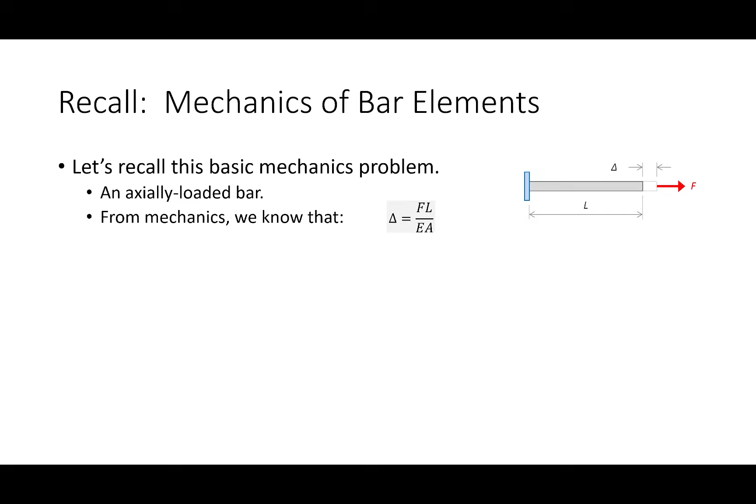How do I get that? I have sigma equals P over A. I have the strain as the change in length over the original length. And then stress and strain are related with Hooke's law if we assume linear elastic behavior. Now, I can rearrange this a little bit. Instead of writing it like this, I'm going to flip and multiply. If I have delta equals FL over EA, I'm going to rewrite that as EA over L times delta equals F. Or in other words, K delta equals F.

Okay? So this term EA over L, I'm going to call the bar stiffness. The term stiffness is very akin to a spring problem from physics. You probably remember that. You had some system that had a spring on it, and the force in that spring was equal to Kx. Spring constant times however much it's stretched or squished.

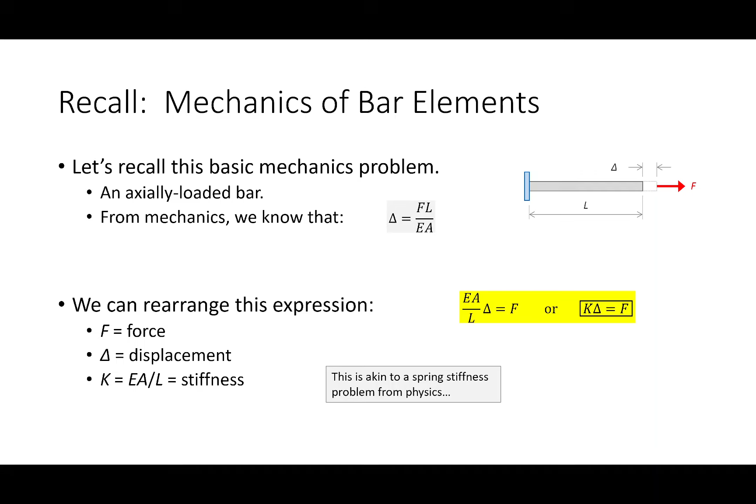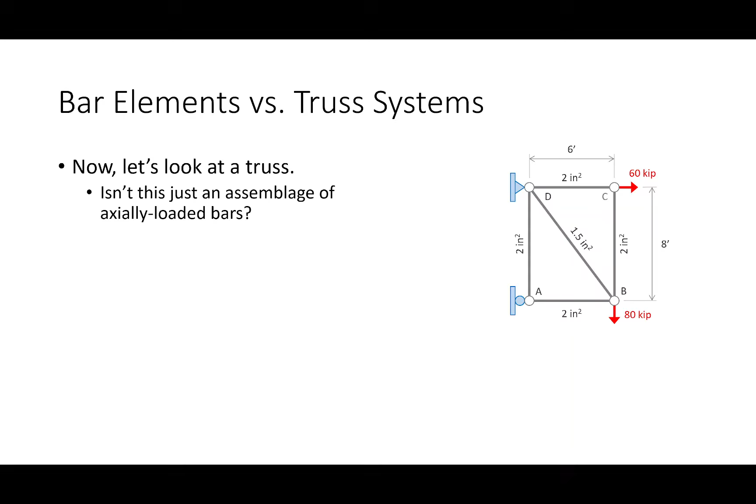Well, the reason I bring that up is that if we're looking at a truss, I propose that instead of looking at it as this big complex system, I would like to break it down into its base components. That truss is just an assemblage of bars. So instead of looking at a single spring constant, a single deflection and a single force, we can look at a stiffness matrix, a vector of displacements and a vector of forces, and turn this basically into a matrix algebra problem, okay?

This is how MASTAN, or really any matrix analysis-based software package, works. The name MASTAN comes from matrix structural analysis. But really any of the simple programs or really nifty programs, whether it's STAAD, RISA, SAP, whatever, they're all doing the same thing. They're all utilizing matrix methods to solve structures. Okay.

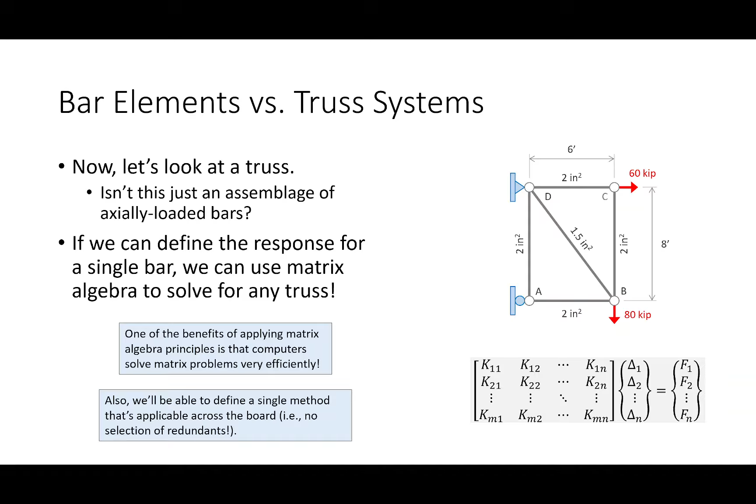The value of this is that we can define a single method, and by the way, everybody here has that method in front of you for a 1D bar element. We can apply this method to really any problem, and start to finish, we'll have the whole problem solved and every response we would need all at once. Okay? So how does it work?

Okay, I showed you this flow chart before, but now I want you to rethink about it. Now we're going to dig into the details. Because like before, what would happen is, here's the model, we click a little button, MASTAN does all this stuff in the background and gives us some answers. Well, now I want to understand all this.

Okay? Now, you could find a number of different textbooks that give you different ways of organizing this. Like, I have it in 4 parts. Some textbooks might have it in 3. Some of them might have it in 7 parts, whatever. At the end of the day, this is generally the same process, regardless of how you want to break it out.

So, the first thing that we're going to do is look at the spring matrix, or the stiffness matrix. I probably won't use the term spring matrix anymore, but the idea is that you're going to write a stiffness matrix for each element in the system, and that you then assemble them into a global matrix for the whole structure. Okay? You'll understand how that works by the end of class today. You then assemble a load vector, right?

And so if you go back to just sort of your basic problem right here, you start out by trying to get your K matrix, then you do your F vector, and then you say, okay, if I've got the K matrix, I've got the F vector, I can solve for my displacements with a little bit of matrix algebra, and then I take those displacements and I back substitute them into the rest of the system to get reactions, internal member forces, etc.

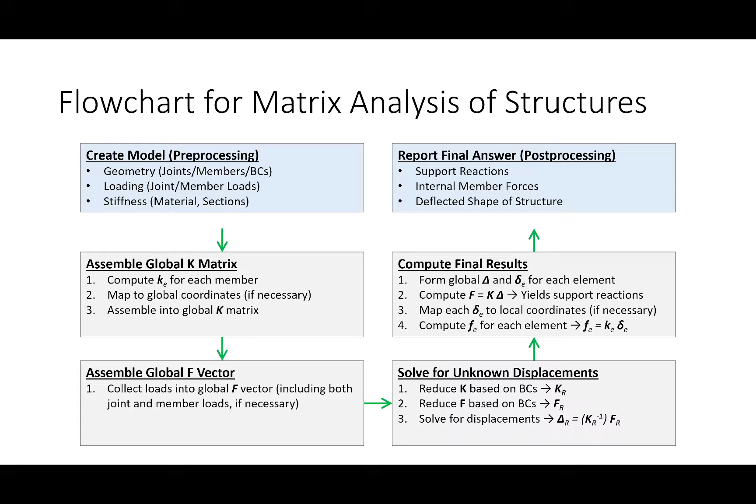And then when it's all said and done, you've got the displacement everywhere. You've got the force in every element. You've got the reaction everywhere, and it's all said and done. And now the only thing left to do is pick out the values that you're interested in, maybe generate any plots, what have you. And that's basically how matrix analysis works.

Okay? Now, we are going to be using matrices, so we do need to have a little bit of a review of matrix algebra. I'm going to cover the stuff that I think is necessary to get through today's lecture today. Then on Wednesday, we'll talk about a little bit more. Everybody in here has probably done a little bit of matrix math at some point, whether it was in high school, maybe you did it in some of your math classes.

I know we've done it in here, because remember when we did 2x2 joint solutions, when we had 2 diagonal members framing into a joint and we would solve 2 equations, 2 unknowns? Same idea, okay? But I want to be a little bit more global in some of the terminology that I use, and I want to make sure we're all on the same page. Okay. All right, so let's just go back to this.

We've seen this before. So the idea is that we can write a simultaneous set of equations in matrix form, okay? We did this a while back when we did joint analysis, and we had 2 equations and 2 unknowns, and we utilized the Casio FX115ES Plus or similar scientific calculator to solve them. Now, your scientific calculators are great for solving 2x2s. They're great for solving 3x3s. When you get to larger systems, you kind of do need to break out some software.

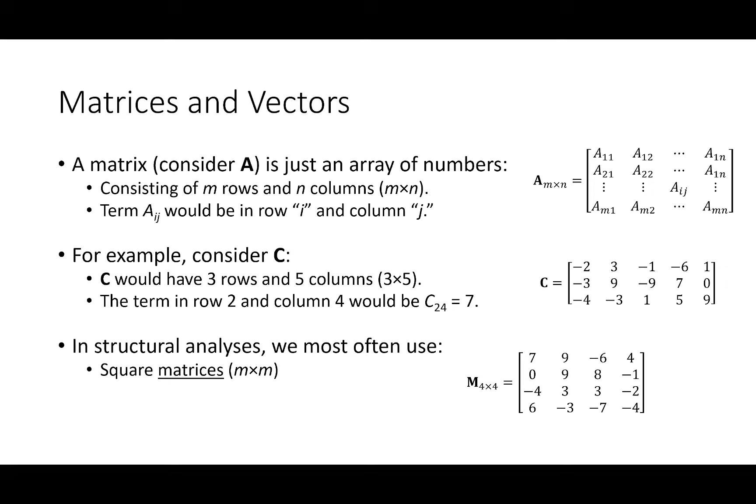Okay. Now, in structural analysis, we primarily only deal with two types of matrices. We deal with square matrices, and a lot of times you won't even hear me use the term square matrix, just by the nature of what we're doing. If I say matrix, more often than not, it's implied that we're talking about a square matrix. The other component that we'll use is a vector. So a vector is basically just going to be a matrix that has a single column.

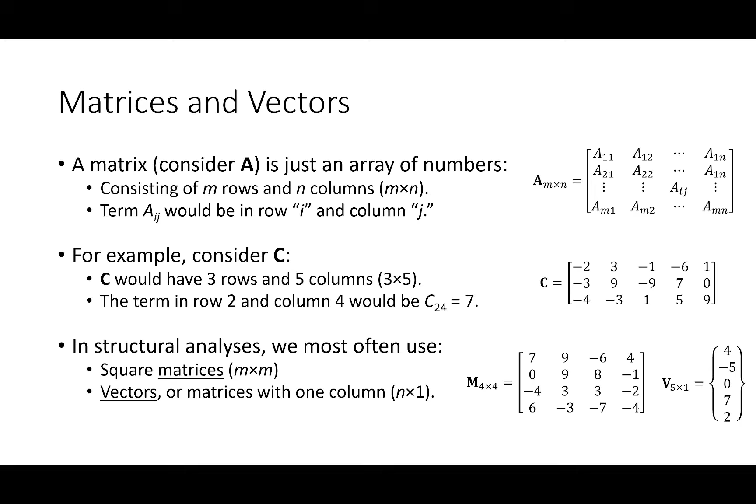One of the things that might have been a little bit subtle here on the screen is that if you open up a textbook and you look at the symbols that we use to define matrices, we'll often use bold letters, but bold letters are kind of hard to write by hand. So what I like to do, because these are really all we're dealing with, is I'll use curly brackets for vectors and square brackets for matrices. So if you see me using these, that's my way of writing this in a bold fashion. I even threw this there to clarify what's going on. Does that make sense? So it's a simple way of making sure we're on the same page.

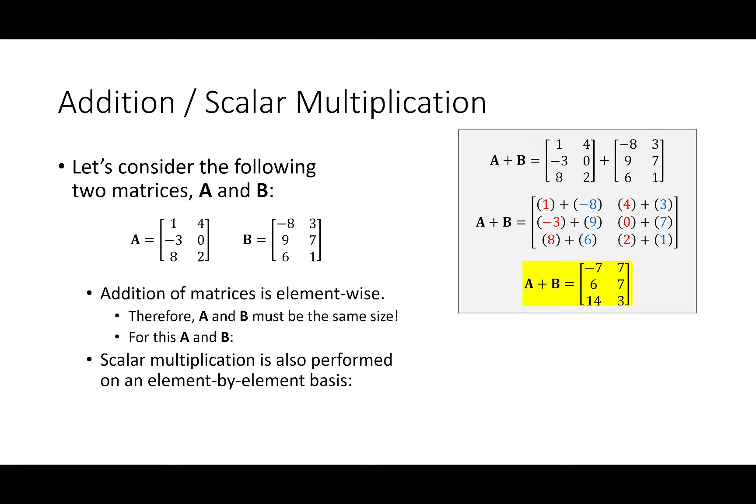How do you do scalar multiplication? Scalar multiplication is done on an element by element basis. So for example, if I have A and I wanted to do 3A, it's 3 times every number in the matrix, and I get this. So the flip side would be if I had a matrix like 2, 4, 6, 8, I could write that as 1, 2, 3, 4, and pull out a 2. If I'm factoring a 2 out, I'm factoring a 2 out of everything. Okay? Does that make sense? Okay.

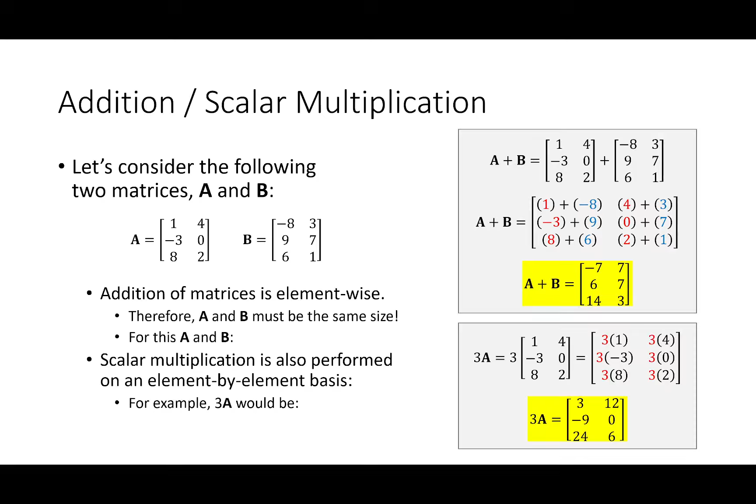All right. What about multiplying matrices? Have y'all seen this before? Do they do this in one of the calculus classes, being able to multiply two matrices? Maybe in Calc 1? Did you do it in high school? Okay. All right.

Okay. All right. So, crash course in matrix algebra. So watch this up here. In order to multiply two matrices, the matrices have to be dimensionally congruent. That is a mouthful. But what that basically means is that if you're multiplying matrix A times matrix B, this term and this term have to be the same dimension.

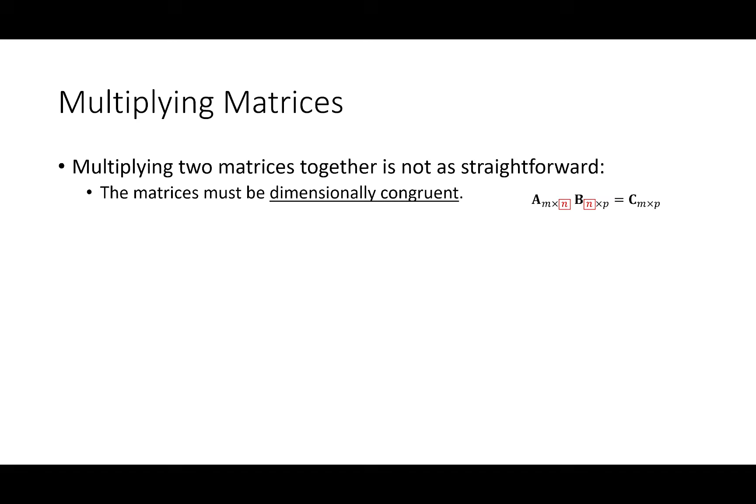Now I imagine many of you have not seen this, but I have a graphical way that I kind of like doing it. So first off, if you want to determine an individual term in the product, what you have to do is go along the row of this matrix and the column of this matrix and add up the products. I like to do it graphically like this. I'm going to show you how it works here in a second.

Now the big thing though, and this is probably the most important point that I want everybody to know, because to be honest, a lot of the matrix multiplication that we're going to do in here, we're just going to let Excel handle it for us. So I'm not super worried that you need to be able to do matrix math by hand, but I do want you to know that matrix multiplication is not commutative. What I mean by that is that in general, A times B does not equal B times A.

You can't reverse the order of multiplication when it comes to matrices. You have to maintain the order. Now, there is one exception to that, and that is when A and B are inverses of one another, which we'll talk about here in a bit. So let me show you this.

Okay, so watch this up here. Let's say I have matrix A and I have matrix B, and I want to multiply them. So this is what I like to do. I like to take matrix A, put it on the left, matrix B, put it up top. And notice how I've got these lines, almost like a grid, like I did it on graph paper. The answer is going to go right here.

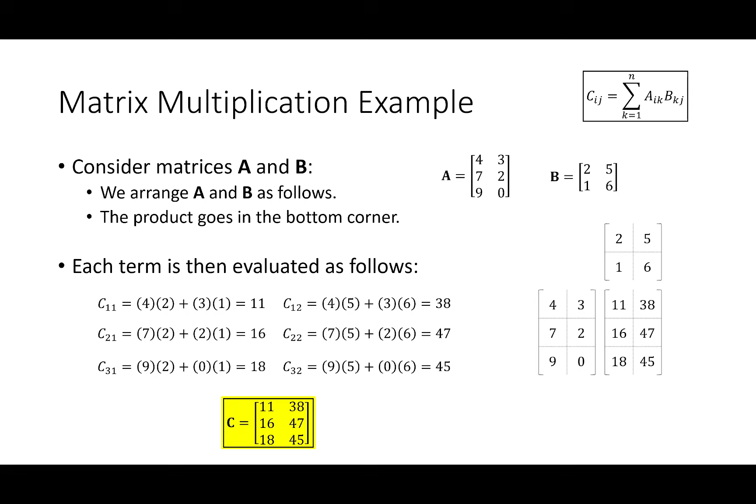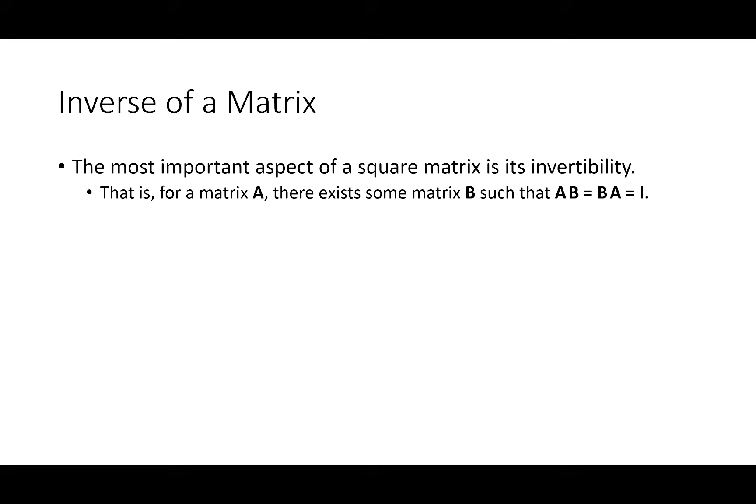Again, we're going to let Excel do a lot of this math for us. But the big thing to keep in mind is you can't reverse the order. A times B does not equal B times A, except if they're inverses of one another. Probably the most important parameter of a square matrix is its invertibility. In other words, if you have matrix A, there is some partner matrix out there in the universe, B, such that A times B equals B times A, and that product is the identity matrix.

So what is the identity matrix? The identity matrix is sort of the multiplicative version of the number 1 in matrices. Let's say I have the number 4. Its multiplicative inverse is 1/4, because when I multiply these two, it doesn't matter what order I do it in, I get an answer of 1. With matrices, there's really only one partner matrix with each square matrix if it's invertible, such that AB equals BA equals the identity.

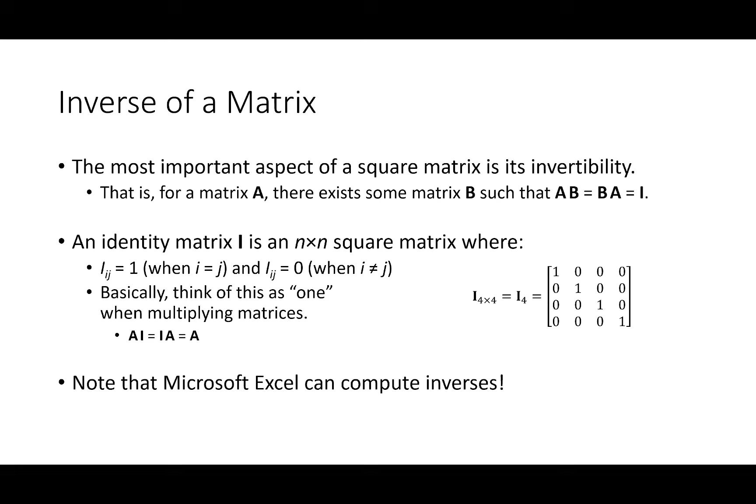And what does the identity matrix look like? It has 1s along the main diagonal, 0s everywhere else. So again, just think of the identity matrix as the number 1 when you're multiplying matrices. Can Microsoft Excel compute inverses? Yes. And in fact, the computation of an inverse of a matrix is like the whole topic of a field of math called linear algebra.

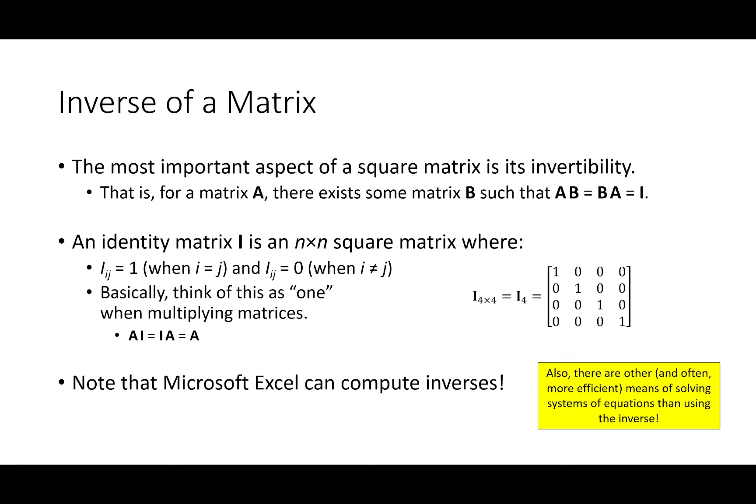So, this is my linear algebra plug: there are often more efficient means of solving systems of equations than just getting the inverse. For our purposes, this is going to be good enough for what we do in here.

Okay. Everybody okay so far? That's enough math reviewed for today. We'll do more on Wednesday.

Okay. So let's talk about matrix analysis. What I'm going to do is start my discussion for today and Wednesday with one-dimensional elements. Okay? We're going to go through a procedure. We're going to go through an example problem. Hold on. Now, what do I mean by one-dimensional elements? I want to start with elements that only translate left or right, okay?

And just to be clear, mechanically, there's no difference between how a bar element behaves and a truss element behaves. The only difference is how we formulate the problem, because truss elements can move left or right and move up and down, okay? I'm going to restrict my motion to left and right. Is that a very practical problem in real-life engineering? No, okay? Is it small enough so that we can understand how this process works? Yes, okay? All right, so we're only going to consider systems that can displace longitudinally, okay?

One thing we need to think about is for a given element, or a given component in a system, we need to start thinking in terms of what we're calling degrees of freedom. Okay? Degrees of freedom are how many total unknown nodal displacements there are. So I propose that each element in a system is going to have 2 degrees of freedom. So when I look at a given element, I propose that it's going to have 2 unique values that are going to define its displacement.

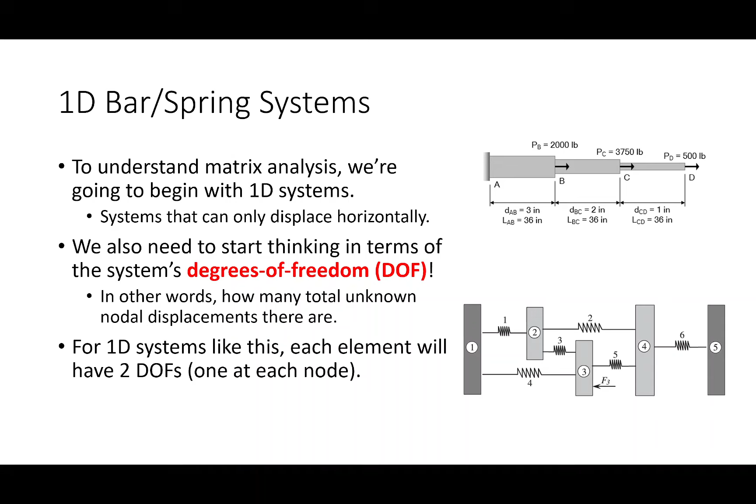How far this node goes and how far this node goes. So we call that delta 1 and call that delta 2. This is going to be a 2 degree of freedom element, okay? And I mention that because that's going to affect how we get our stiffness matrices and so on and so forth. Now, how are we going to do that?

Well, let's first off recall some of the ground rules that we're using for matrix analysis, and you'll notice I blanketly copied a slide that I showed you a little while ago. Remember the terminology between joint and node and member and element, that those were going to be interchangeable. Remember that with units, everything needs to be consistent, so that's going to be important for what we do together.

The sign convention, we need to refer to quantities consistently. So we're going to say that everything going to the right is positive, everything going upward is positive, counterclockwise is positive, tensile forces are positive, okay? You've already seen this before, right? I've shown you this, we showed you this when we did matrix analysis, or sorry, when we did MASTAN.

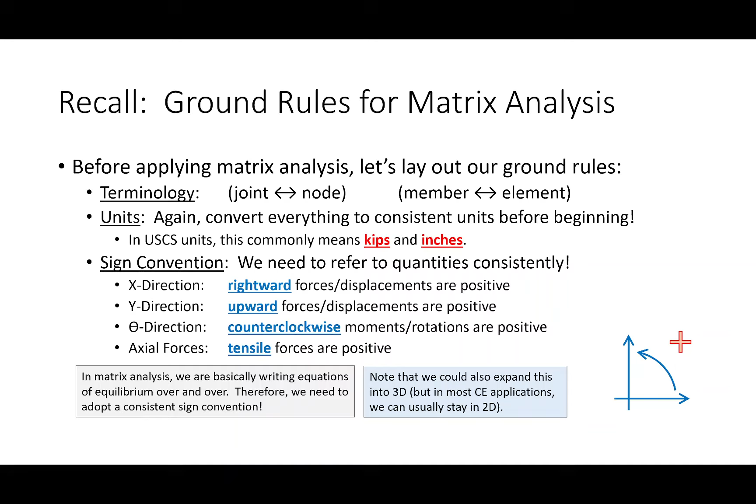Okay, so with all that in mind, I want to take a look at a single bar element, and let's see if we can define what the element looks like, okay? So for a one-dimensional bar element, let's take a look at what I got here, and you'll see a lot of this is going to pop up that I have here on the board. So here's the element. So here I'm calling joint 1 and joint 2, or node 1 and node 2, okay? So here's the bar element. We're going to say that its E is constant, its area is constant, and that it also has some length L, okay?

Now, keep in mind that forces and displacements to the right are positive. Remember what we said in matrix analysis, everything going to the right is positive? So I propose that there is an unknown force on this side of the element, and an unknown force on this side of the element. I'm writing them both to the right because I'm initially assuming they're positive. If they come out negative, well then I get a different answer, okay?

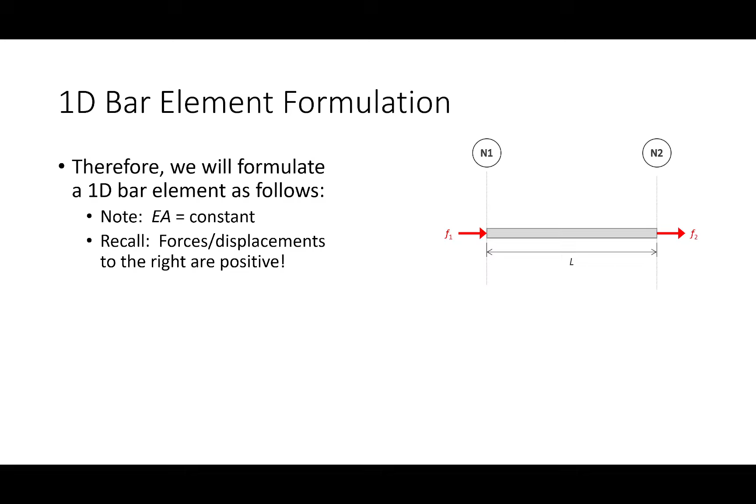I also have a displacement on this end and this end. I'm calling that displacement delta 1 and delta 2. I'm also showing that they're both going to the right. If they come out negative, it just means they're going in the opposite direction. Okay. Now we need to derive a stiffness matrix for this element. So here's what I'm interested in. All right, I want to define a stiffness matrix for this element. We'll call it KE. Stiffness matrix for the element, and I want to figure out what this is.

I'm trying to figure out what that is, okay? And by the way, you already know what it is because it's right there on your handout, but we're going to see if we can figure this out together. Okay. Now, how are we going to figure that out?

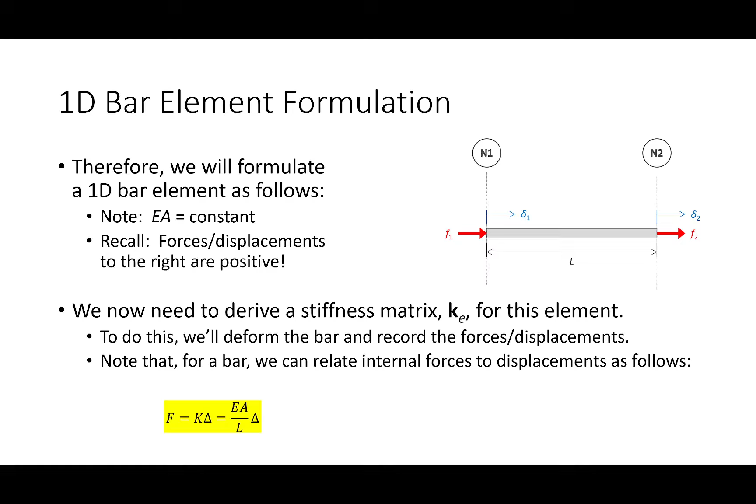Well, we're going to use this right here, F equals K delta, which is EA over L times delta. We already figured that out. One thing I'll say is that if we were using a spring instead of EA over L, we would just use the spring constant, so this will work for springs as well.

Okay. All right. So before I start clicking through the slides on the screen, I want to see if we can do this here on the board. Now, don't worry, everything I'm putting on the board is here on the slide as well, but I want to see if you all can walk me through what I have here on the slide. Okay, so I have here an undeformed element, and now I'm going to do a deformed element. Now let me show you what I'm going to do.

I'm going to deform this element by taking this point and moving it over, taking this point and moving it over. But I'm not just translating it, I'm deforming it. So I'm going to do it in a little bit of an exaggerated fashion. So I'm going to take joint 1, move it about right there, take joint 2, and I'm going to move it all the way over there.

Okay. All right, so just to put some dimension on this, I'm saying that this dimension right here is delta 1, and this dimension right here is delta 2. Does that make sense? Everybody okay on that? Okay, so all right. Is everybody in agreement with that, that delta 1 is less than delta 2? I mean, here's delta 1, big old delta 2, right?

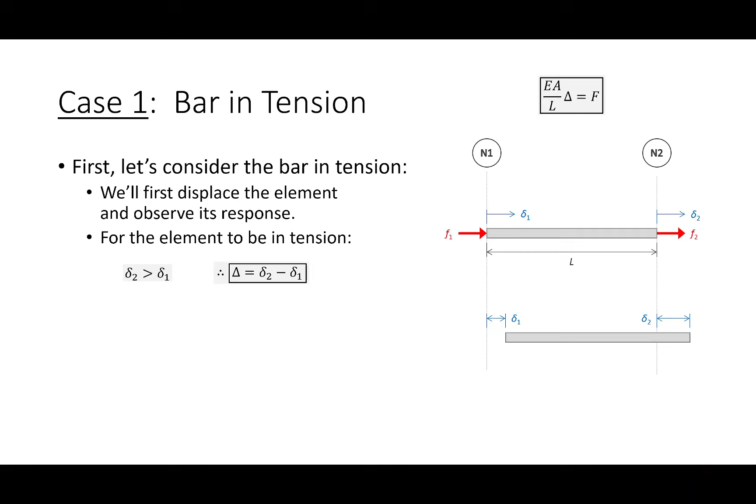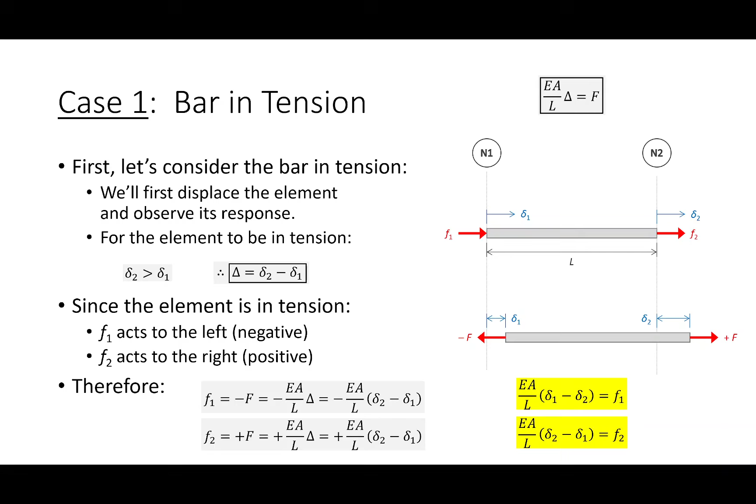Since the element's in tension, F1 acts to the left, so it's negative. F2 acts to the right, so it's positive. Therefore, chug it all out. Nice little pretty equation. Then do a little bit of algebra. By the way, hold on. One thing I will say, let me go ahead and say this. This is if the bar is in tension. Sort of keep your eye on these equations right here.

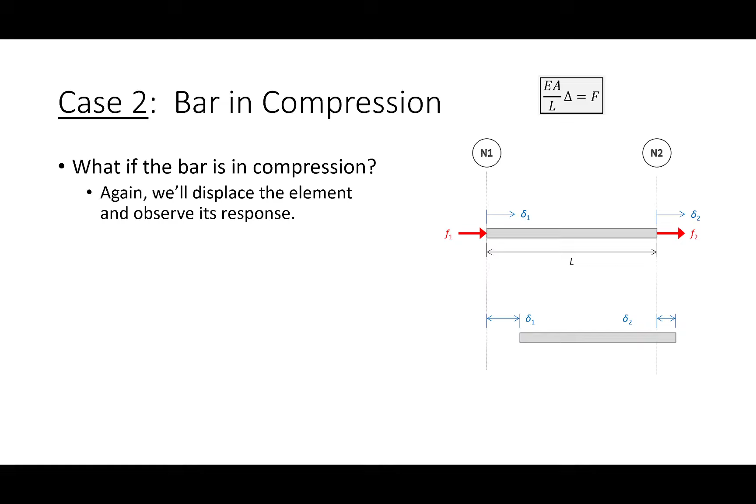If we were to say, okay, here's the bar in tension, but if we were to do it in compression, would we get the same answer? Well, we have some observed sign differences. This one would be bigger than this one. All right, so we'd have a different displacement there. We have this one positive and this one negative. But if we go through and carry out all of the arithmetic, we end up finding that we actually get the same answer as we did before.

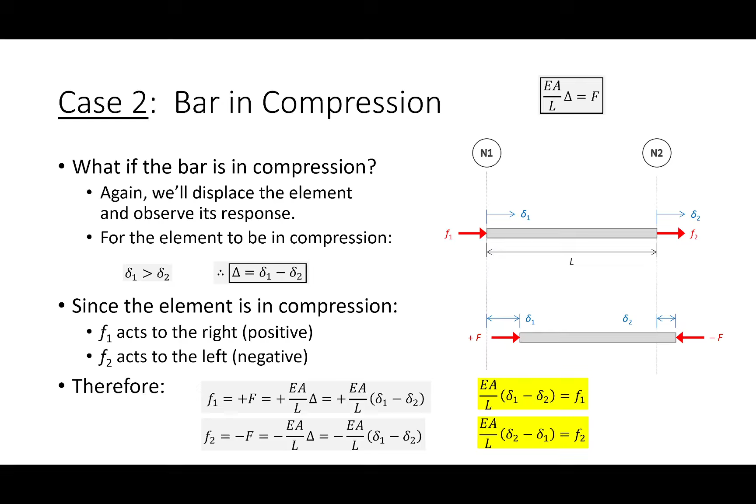So these expressions work whether or not the element's in tension, whether or not the element's in compression. It actually works if the element doesn't have any load in it, because if delta 1 equals delta 2, then this will all come out to be a zero force member. So it's the same equations as before. So all we have to do is take this, do a little bit of expanding and rearranging, which is what I did here on the board, put it in this format, write it in matrix form. Boom, there's my stiffness matrix.

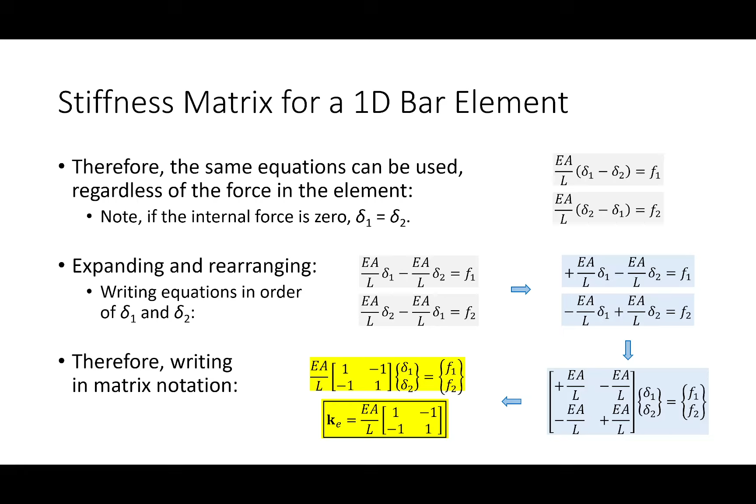Okay? I did that a little quick here on the screen, but I think between what I did on the screen and what I've got here on the board, this all kind of makes sense. Everybody okay with this? Okay. So let's go through the procedure start to finish for a matrix analysis. So now that you've got your handout, let's see if we can work through some of this. So part one is to assemble the K matrix for the structure. So the first thing we're going to have to do is write a K matrix for each element. We're going to have to assemble them into a K matrix for the whole structure.

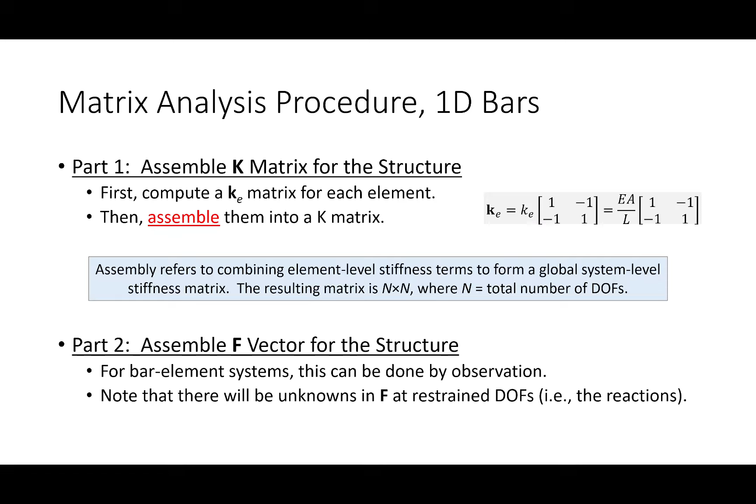Now, assembly is something I'm going to show you here in a little bit. What it does is it corresponds to combining each of the terms in a likewise basis. So it's not the same thing as matrix addition. It's a little bit different, but I think you'll see what I mean here in a second. Once we have our K matrix for the structure, we assemble a force vector for the entire structure. This is really, really easy, because all you have to do is just look at the structure and get your force vector. The force vector is going to contain unknowns, though, at any degrees of freedom that are restrained. Those are the reactions. Okay? Don't worry, we'll do this together.

Once you do that, solve for the displacements. This will be something that we probably do a little bit on Wednesday. What we do is we knock out the rows and columns associated with the boundary conditions. So we knock out the rows of K and F and the columns of K as appropriate. And the reason why is when we have this big old system of equations, we knock out the rows that are associated with restrained degrees of freedom because we don't need those equations right at that step. And we can strike out the columns because when you do the matrix math, they end up getting multiplied by zeros anyway in your matrix multiplication.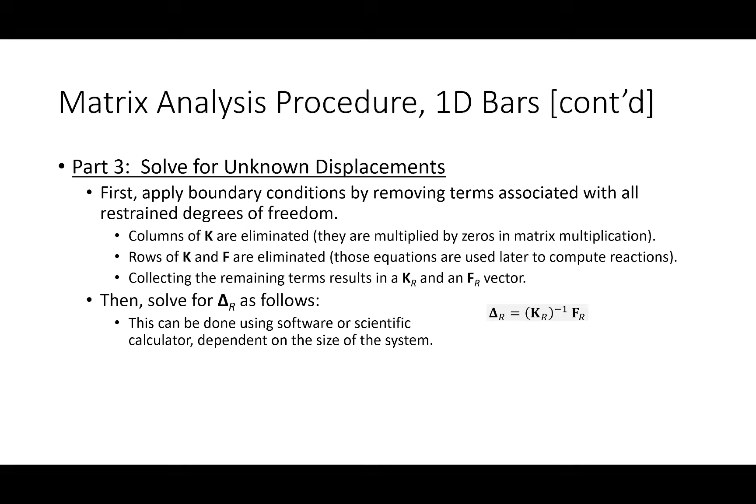And so what we'll have is this big old K matrix, this big old F vector. We'll whittle it down into a smaller K matrix and a smaller F vector, which we call KR and FR. And they are reduced based on your boundary conditions. Don't worry, this part's really easy and it's pretty visual as well. Solve the system. This is something that software packages can do all day, every day. It can be done on a scientific calculator as well. And then we will back calculate the results. This part is something we're going to do on Wednesday.

But basically what you do is you write a displacement vector for each element, multiply by the stiffness matrix of each element to get the force vector in each element. And then we'll also do F equals K delta for the system as a whole to get the reactions.

I'm going to blow through this part a little quickly because I want to get to at least a little bit of our problem today. Ooh, we're running short on time. Actually, you know what? Here's what I think we're going to do. I don't want to rush this. And we've got enough time today and tomorrow. I was going to try and do a little bit of this today, but I don't want to rush it. The only thing I will do is talk a little bit about this example, and we'll just dive into it on Wednesday.

Okay, so this is a bar element example we're going to do together, and I'm going to say a couple things about it. So first off, this structure is indeterminate, okay? And without an understanding of the relationship between forces and displacements, we cannot solve this structure. Now that's not to say we have to use finite element analysis to do it, but we can't do it without understanding EA and L. So let me just say a few words about this before we leave today.

So number one, notice how I've numbered each of the joints and I've numbered each of the elements. I'm trying to use some consistent symbols here. So I'm using circles for the nodes and I'm using square boxes for the elements, okay? And I mention that because I'm going to have something a little wild on your homework assignment, but if you just maintain that sign convention, it's pretty easy.

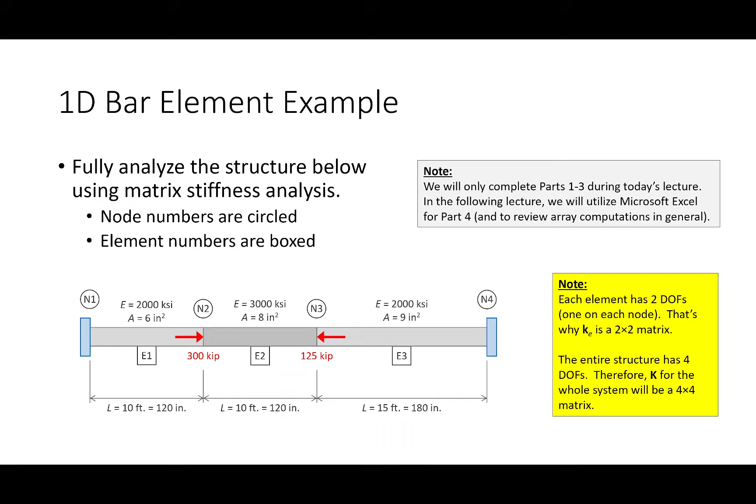So here's what I want you to do. Wednesday, I want you to bring your laptops, and I want to show you something real quick. Like I said, if you go to Blackboard, you'll see under lecture notes, under matrix analysis, this Microsoft Excel template. I'm going to show you what that looks like real quick. So here's what it looks like.

So there's 2 tabs. The first tab on the bottom is just going to be us learning how to do matrix math in Excel. So we'll start that really quickly. I've given you 2 matrices, and we're going to talk a little bit about how to add them, how to do transposes and multiplications and all that. Then we're going to get into our bar example.

And I have this little spreadsheet set up that's got all the terms, it's all set up to be able to do the matrix assembly. It's set up to really do the whole problem. So I've got all the K matrices already figured out, but I basically got it set up to where we can knock this out pretty quickly. So on Wednesday, have this spreadsheet downloaded, have your laptop ready to go, and we'll get right to it.